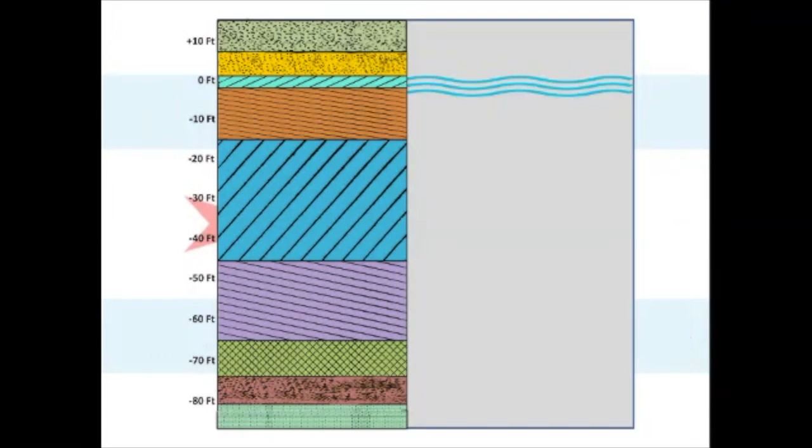And in that bulletin, there is this core sample of the different layers of soil beneath the surface in Chicago. Core samples taken in different places revealed many layers of material between the surface and the bedrock, which throughout most of the Loop area is 80 feet below the river and lake level. So this was way out of reach of the technology available to the engineers in the years after the fire.

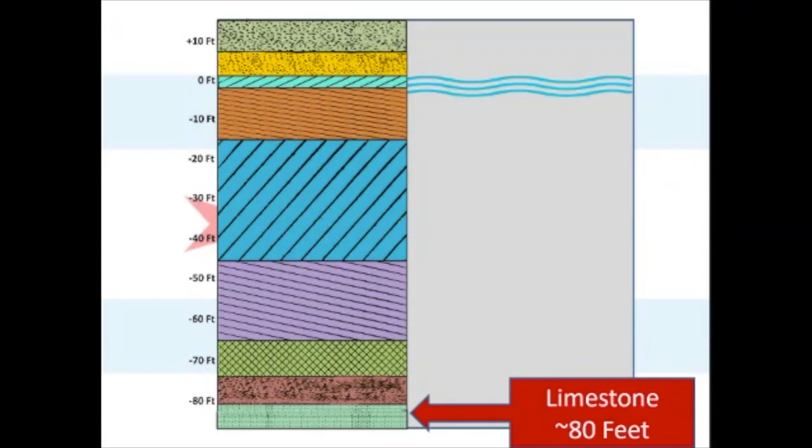The top layer, due to that grade raising we discussed, was a mix of miscellaneous fill. And just below that was a layer of gray lake bottom silt. It was noted to be of variable quality, but generally loose and compressible. It was the material that turned to mud in the spring and led to shifting foundations and settling.

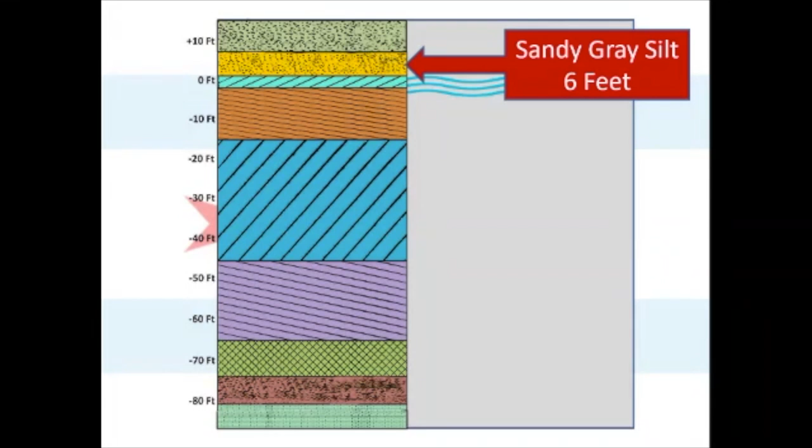Now, according to Peck's bulletin, this next layer is, quoting, a crust of partially oxidized blue and yellow clay, which acquired its stiffness by desiccation during a temporary low water stage of the geological forerunner of Lake Michigan. Although the strength and thickness of the crust varies, it is one of the most important features of Chicago's subsoil because it is the only material of high quality at a shallow depth.

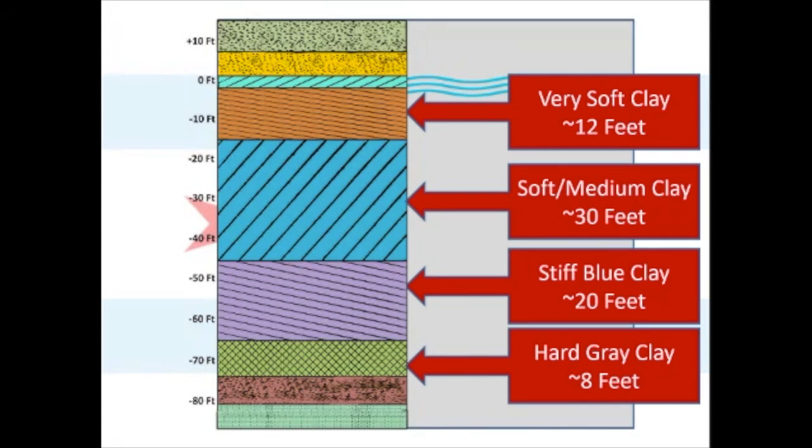So most of the early skyscrapers we're going to discuss in a minute were founded on this crust, and it helped to spread the loads of the footings of those buildings. Now, the clay deposits beneath that oxidized crust were areas of settlement, and it gets gradually stiffer as the depth increases, and the thickness of each type is variable, although what you see here is a fairly accurate representation of most of the area downtown. And then at the very bottom, there is some sand and silt just above the bedrock.

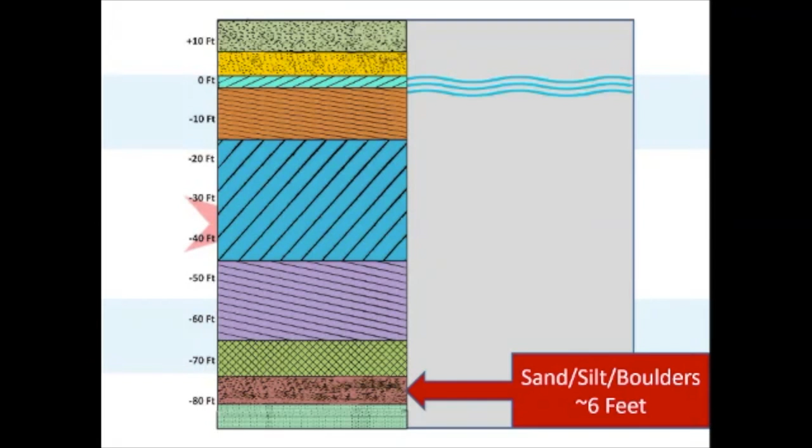So this stuff was not the kind of thing you could anchor a building in for the most part until you get to the lower depths. If you broke through that crust by accident, or if you tried to do it on purpose, odds are your building was going to sink. So in the years after the fire, the city's architects and engineers were tasked with figuring out how to build on top of that dubious soil. Van Osdel was quite active, and like his peers, he was using his knowledge and skill and applied that to come up with new solutions through trial and error.

The solution that the builders tried with this building was an experiment with a mat foundation. It was common before this to place footings for a foundation a few inches above their desired level, and then allow the weight of the building to push them into the soil to a point of final settlement. The problem had always been uneven settlement, which led to buildings with walls that would sag or buckle. Now here, what they tried to do with their experiment was to pour a mat of concrete that, when hardened, connected all those footings into a single unit. It was thought this would spread the load on the entire site and force the building down to final settlement in a uniform way. Unfortunately, the mat just cracked under the strain and stresses.

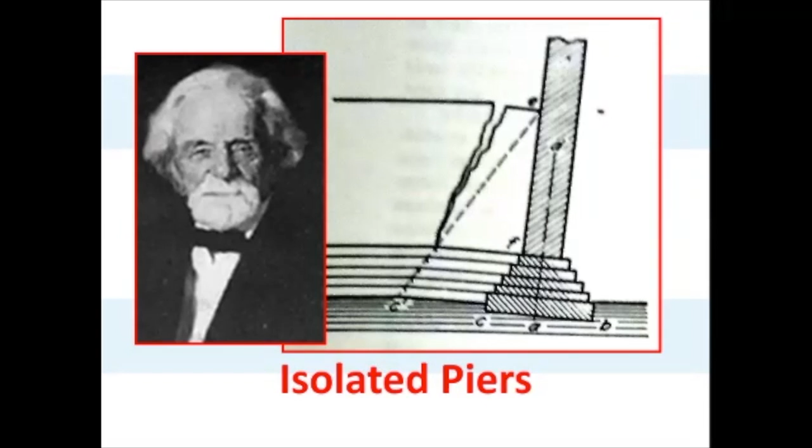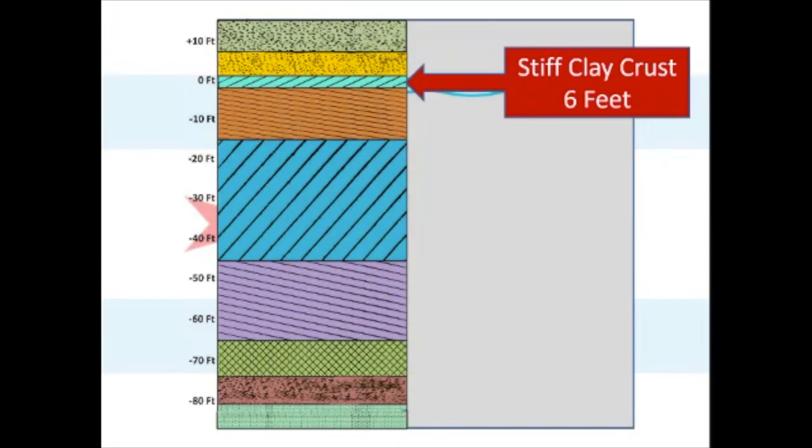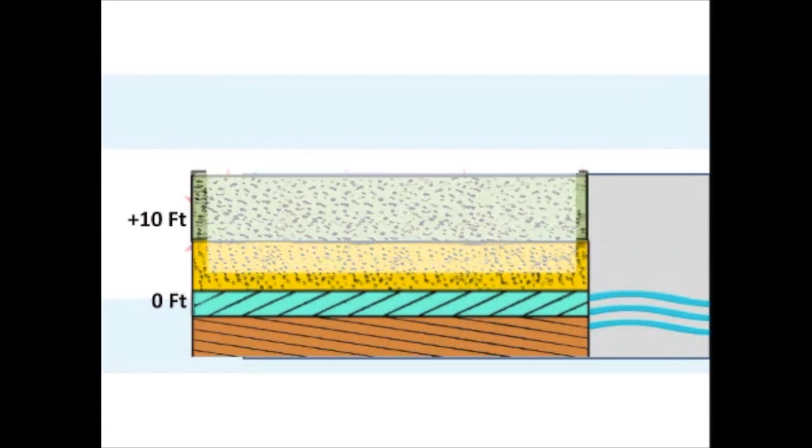The key to keeping the post-fire tall building on an even, steady footing was to take advantage of that stiff crust and let the footing settle upon that. So taking a closer look at this upper section of the cross-section, in the first phase of construction of a new building, they would excavate the site, and then they would start building the spread footings for an isolated pier. The spread footing was called that because it spread out in a pyramid shape, and these were made of dimension stone, just big blocks of stone, each layer larger than the one above, all held together with a concrete mortar.

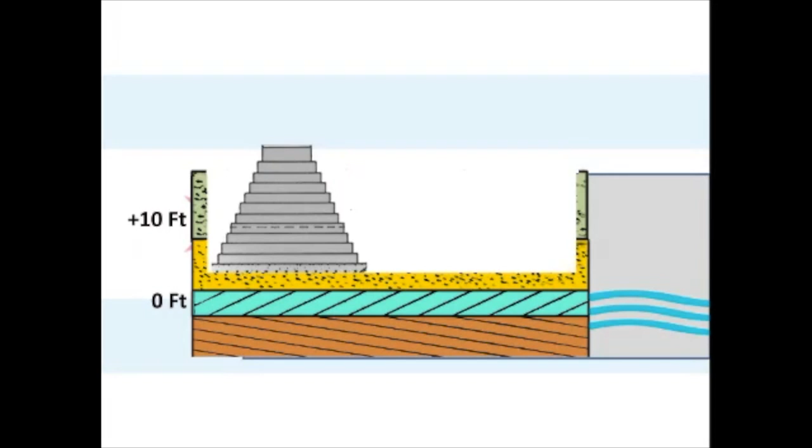Then it was necessary to place a load on the footing to mimic the force that would be exerted on the footing when the building was in place. So Frederick Baumann suggested loading the footing with pig iron. So here's some pig iron. And the pig iron was loaded onto the footing. And the fully loaded footing would then settle, in most cases settling onto the surface of that crust. The same process would be repeated for the other footings on the site until all had reached maximum settlement.

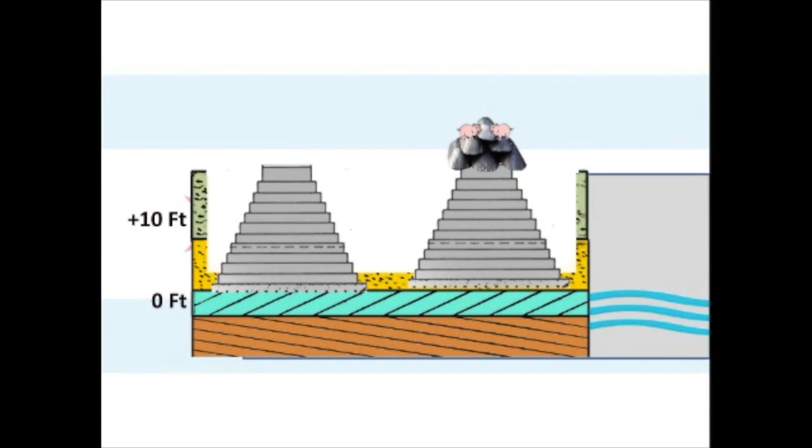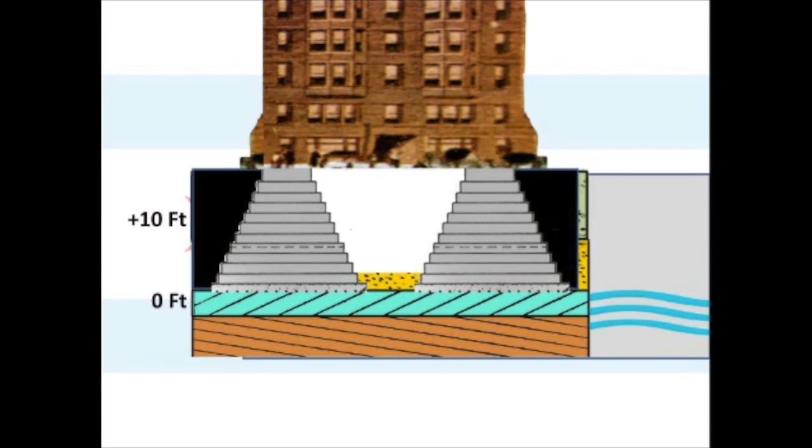Now, only once they'd all settled did they build the building. And so the footings were pre-settled. And once the footings were complete, the building would then be constructed on the isolated piers. And if everything went as planned, the building would remain on their even and sturdy footings going forward. Now, one problem with these bulky stone footings is they took up valuable space in the basements of the buildings.

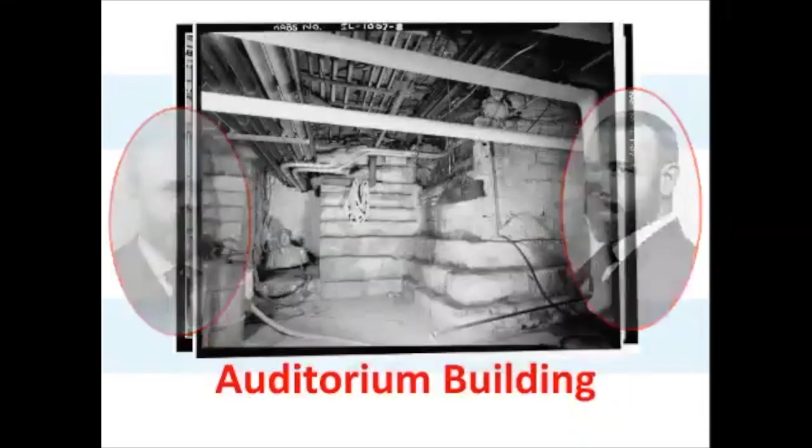An example of that can be seen with the landmark Auditorium Building, opened in 1889, designed by Dankmar Adler, you see on the left, and Louis Sullivan on the right there. This is one of Chicago's true masterpiece landmark buildings. Now, here's a look at the basement level, where a large portion of the space is taken up by these spread stone footings.

Now, as an aside, and as incredibly well as this building was planned and engineered, it was still dependent on the shallow crust for success. And it was found out the hard way that the crust was an inconsistent and sometimes unreliable ally. The heaviest portion of the building, the tower here, settled much more than expected.

So if you've ever gone to a play at the Auditorium Theater, you might have noticed that when you leave the sidewalk, you have to step down into this area in between the doors, the little vestibule. And then when you go inside the theater lobby, you're now sloping up into the theater. And that's all because of the settlement of the tower more than the rest of the building.

Now, another prominent influential architect was William W. Boyington, whose influence increased when one of his designs, the Chicago Water Tower, survived the fire. But he ran into trouble depending on the crust to be consistently supportive when his Board of Trade was built in 1885. Soon after this imposing structure opened for business, it was noted that the tower began to lean out from the true vertical, and it was leaning out over the sidewalk.

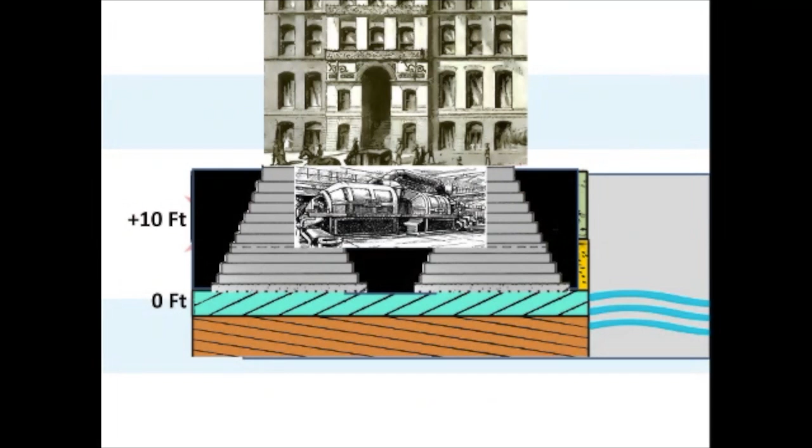Root noted that iron rails could carry the same load as dimension stone, but with much smaller dimensions, and thus much less space taken. And at this time, the railroads were transitioning from iron to steel rails, thanks to the Bessemer process bringing the price and availability of steel way down. So scrap iron rails were plentiful and inexpensive.

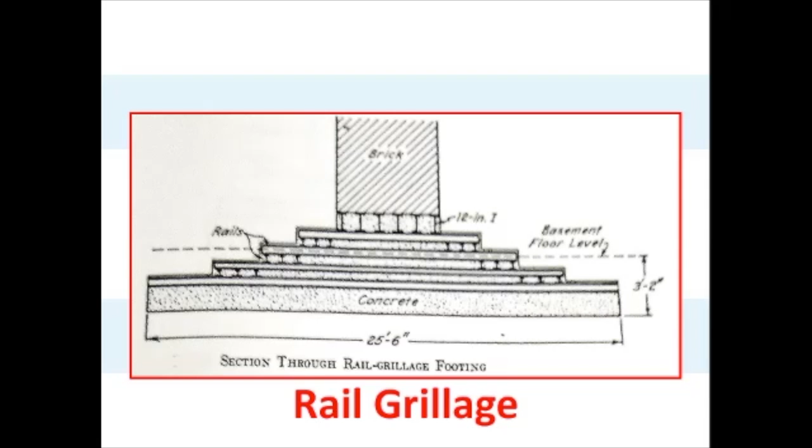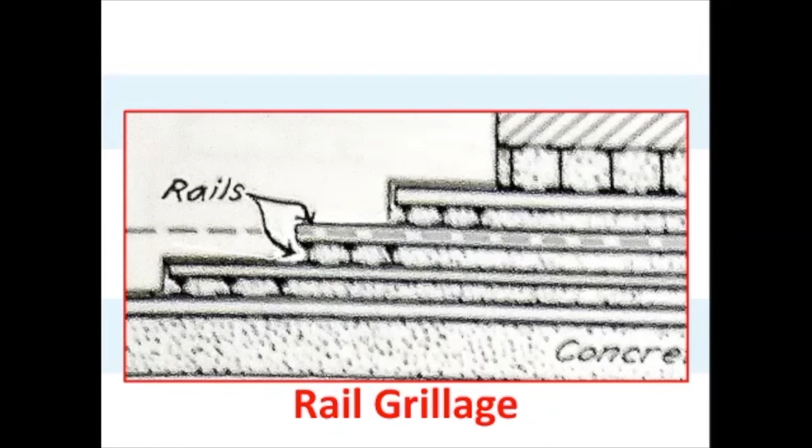So Root proposed that for the portions of the Montauk Foundation, they could use a grillage of scrap iron rails. We'll take a closer look at this detail here and see that there would be a layer of rails, and then the next higher layer would have the rails laid perpendicular to the one below. Then the spaces in between the rails could be filled in with concrete to keep the rails from rusting. So instead of these bulky stone footings, the grillage would take up much less space, leaving more room for machinery and equipment.

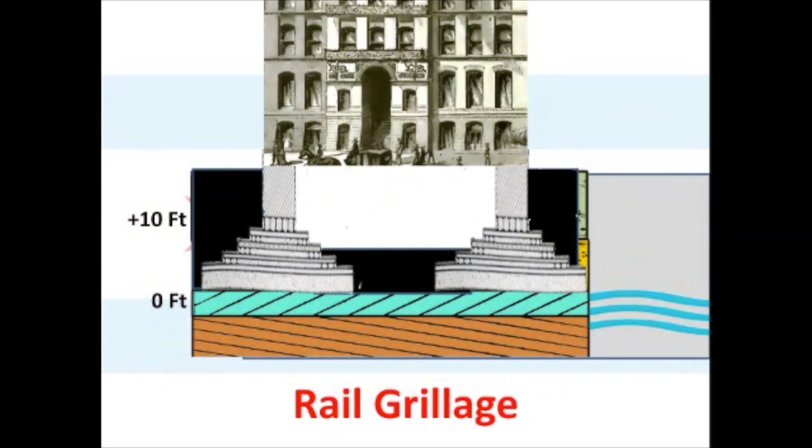So the first building to be supported on 100% rail grillage footings was Burnham and Root's Rookery, built in 1888 at the southeast corner of Adams and LaSalle. But the problems with spread foundations, whether of iron or steel grillage or pyramid stone, are that they took up too much space in the basement area and could not be built any deeper than that crust that they needed to be supported on. And the crust, while normally reliable, started to be proving more and more unreliable as buildings got taller.

So the next concept they used to try to build heavier loads and use foundations to greater depths was the concept of driving piles. Now, when I first heard about driving piles, I have to admit that the image that they conjured in my mind was this. So if you're anywhere near my age, you might think driving piles means a pair of gomers behind the wheel of a truck.

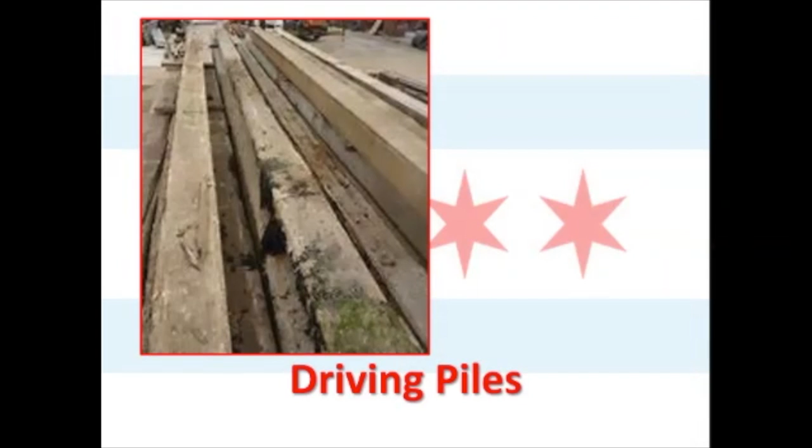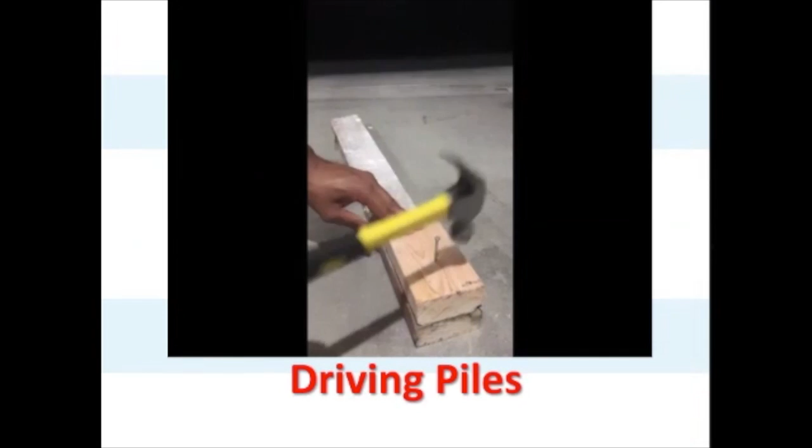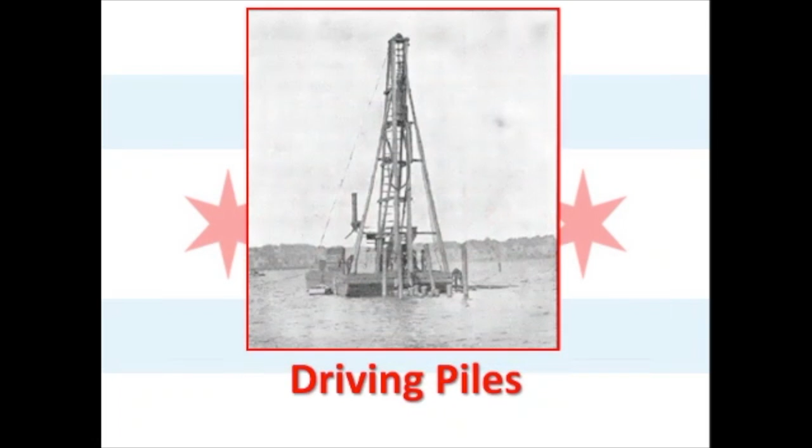Actually, what piles are these. They're just long wooden stakes. And driving them, well, if you've ever done this with a hammer, you know what driving is, like driving a nail. So what they did was they took these long wooden stakes and they drove them into place by pounding them in. And they would set up a derrick like this, put the wooden stake vertically above where they wanted it to be pounded in. They'd raise a big heavy weight to the top of the derrick and slam it down on top of those stakes over and over and over again until they are pounded all the way down into the ground.

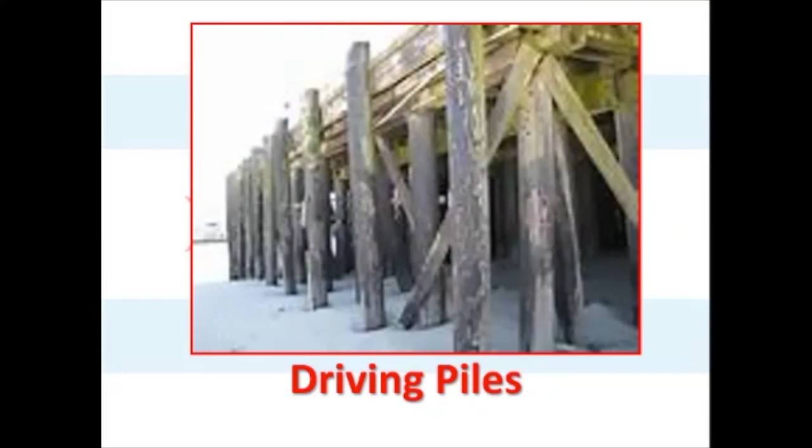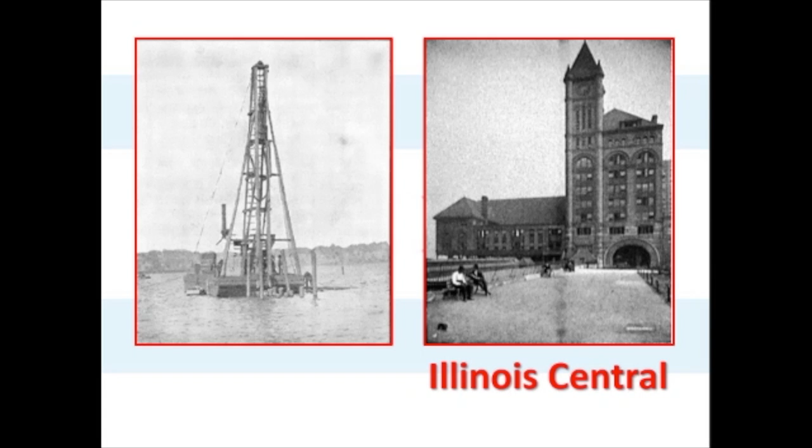Now, this drawing from Peck's bulletin shows the cross-section of those pile footings at the IC station. After driving the piles, the tops were sawed off 3 feet below the water line. Then concrete was filled in between the piles, and a 12 by 12 oak cap was placed on top across each row. Dimension stone was then placed on top of that timber.

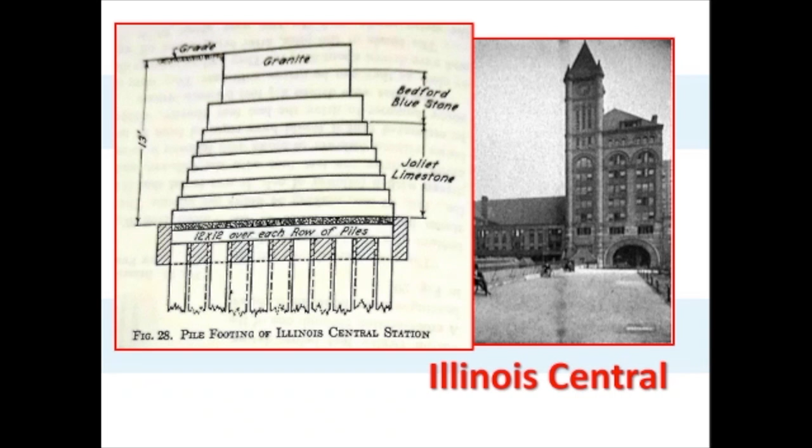Now, both of the railroad stations were south of the main business district and at a distance from most other structures. That can't be said of the Garrick Theatre building, which was built in 1892 and designed by Adler and Sullivan. It was to be built right in the middle of existing structures. After doing some core sampling at the site, it was determined that that shallow crust simply was not going to be supportive of a tall building. It just was not going to do it.

So before it was constructed, the site had to be cleared of its previous structure. Then the pile drivers were put in place, and they were given a sufficient number of blows to make sure that their points had penetrated that hard clay 50 feet down. The tops of the piles were then cut off 3 feet below the water line and were covered with a grillage of oak beams and concrete.

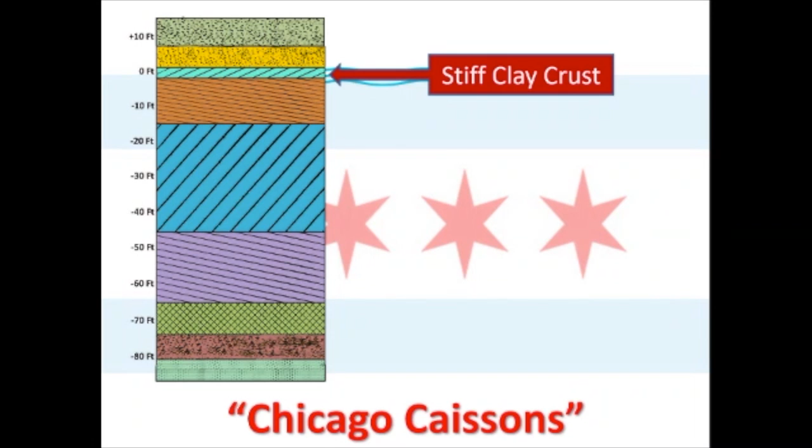Now, going back to our look at the layers of earth found under Chicago, the stiff clay crust just under the surface near the water level had been the usually satisfactory but sometimes unreliable support for the early shallow spread footings. Piles, on the other hand, were driven down to between 40 and 60 feet to make contact with another layer of hard gray clay known as hardpan.

Sooy Smith's idea was later dubbed Chicago caissons. Now, that's a term he didn't use because it's actually a misuse of the word caisson. Caisson means basically a hole in the ground that is a chamber for working. So what he did here was he dug a well, and then that well would be filled with concrete to create a concrete pier. So what we now call a Chicago caisson is really just a concrete pier.

But at some point after Smith started using this method, another engineer started referring to the pier itself as the caisson, when in fact the caisson's the hole, not the pier. But nonetheless, now, forever, whenever these are used, no matter where they are in the world, when people dig a hole and put concrete in it, they call it a Chicago caisson.

Now, Sooy Smith decided that the way to get to the hardpan layer without pounding was to excavate a well, fill the well with concrete, and then the concrete pier could carry the load of the building. Now, the problem with this method, the difficulty, is that you dig a well, what happens? It fills up with water, especially when you're digging under the water level. So the water had to be continuously pumped out of the well as it was dug.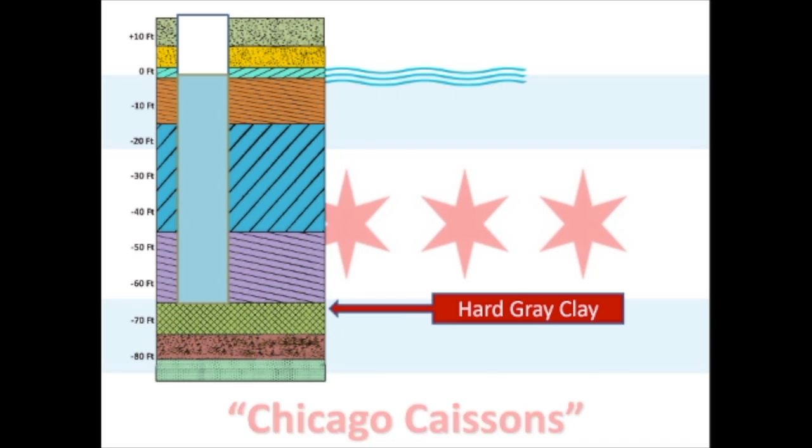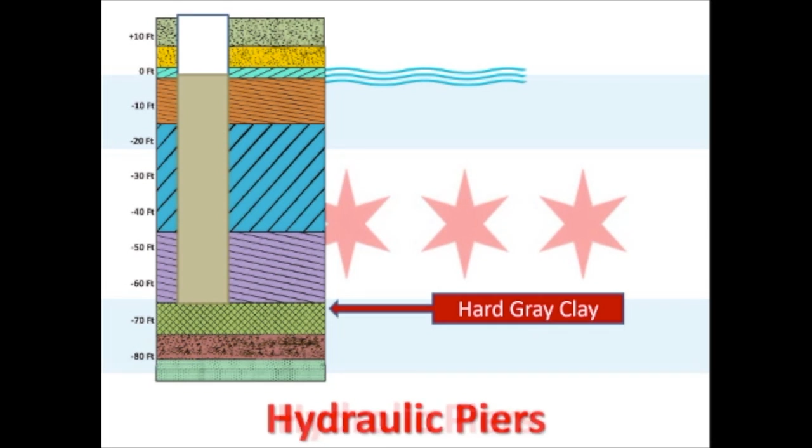Now, this same method, by the way, would continue to be used even for the newer buildings that had to go beyond the hardpan. Hardpan was fine for buildings of a certain weight, certain load bearing, but the taller buildings that we have now, they dig all the way to bedrock and put the pier there. So it's the same method, it just goes deeper. So rather than this, they would go all the way down to limestone, like that.

Now, as the well is dug, though, the walls of the well had to be carefully supported against enormous pressure. General Smith wrote about the procedure. In making the excavations, the sides of the well were supported by oak sheathing held in place by steel rings. And the sheathing was being put in place as fast as the excavation progressed. So these concrete foundations varied in diameter from 5 feet to 6 feet wide at the top and 6 feet to 8 feet at the bottom.

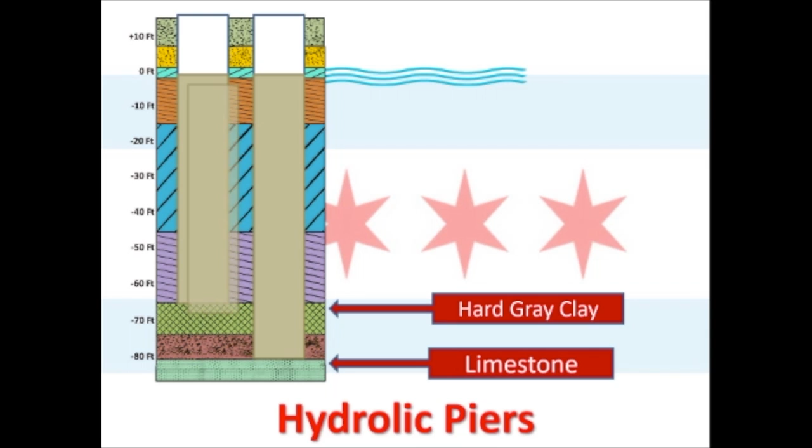So Sooy Smith next went to work on the old Colony building at the southeast corner of Dearborn and Van Buren. This had been designed by Holabird and Roche, and it was 3 years later that there was already some severe uneven settlement due to its shallow spread foundations. And it was the south wall where the settlement was happening. So what Sooy Smith did was he went underneath this building that was already there. Underneath an existing building, there's no way he could pound piles in. You'd have to tear the building down to do that. So he went ahead and used his concrete pier method. He underpinned the south wall with 4 concrete piers.

So he would then write a bulletin at the time arguing that from now on, there should be no more shallow foundations. They're just not going to hold up in the long run. The extra money should be spent up front to either drive piles or, if that's not feasible, dig your wells and put in the concrete piers, because it would end up being less expensive in the long run to do it from the get-go. Now, that idea took about a decade before it caught on with other builders.